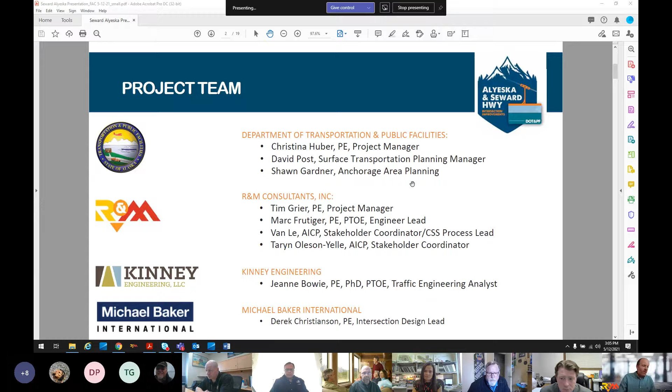So that's the project team. Quick overview - obviously the description of the project makes it pretty obvious where we're at, but just in case, we're at the intersection of the Alyeska Highway and Seward Highway near Girdwood.

The dashed green boundary you see on this figure is our study area. We tried to capture an area large enough to cover the largest possible alternative we could come up with. The pink or purple highlighting shows the extents of both Alyeska Highway and Seward Highway that are part of this project.

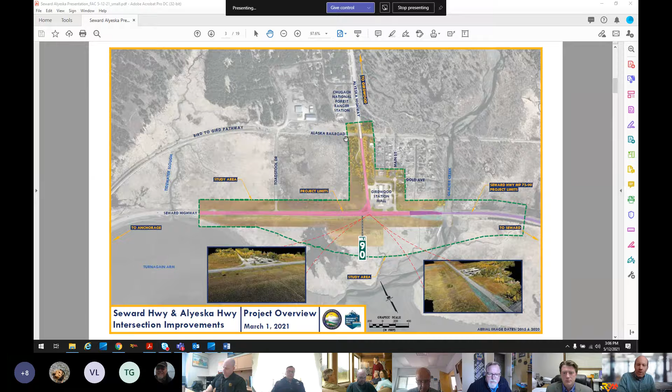This project is intended to improve the safety, capacity, and operations at the Seward Highway and Alyeska Highway intersection. That's the basic objective. Our goal right now is to select the preferred alternative out of a range of alternatives, and I'll get to those in a minute, then move that forward into the environmental process, or what we call the NEPA document.

We've developed 11 conceptual alternatives, each of which will be evaluated based on criteria I'll show you later. 11 is quite a large number, so we're trying to reduce that down to about 5 so we can be more efficient in the detailed analysis. These 11 conceptual alternatives haven't been evaluated in great detail yet, which is why we need to narrow them down. Let me dive right into the alternatives.

Can everybody see it okay? Am I going too fast, too slow, or is the transition working out? Any feedback? Everything okay? Good to go, all right, cool.

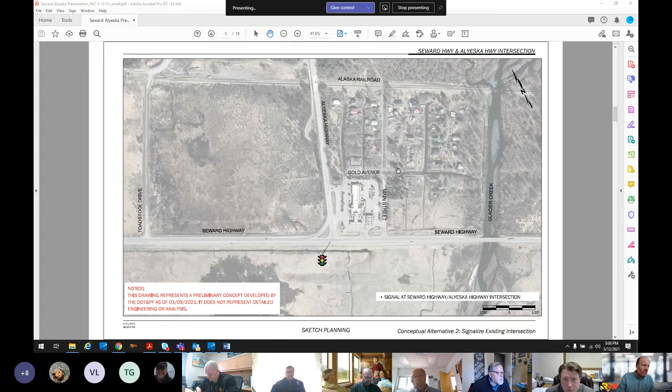Let me go back to the previous alternative so you can visualize it. Somebody coming down Alyeska Highway southbound towards Seward Highway wanting to take a left to go towards Seward or the Kenai Peninsula - that's also our most concerning traffic movement at this intersection. Taking a left, you have to first cross Anchorage-bound traffic, then cross Seward-bound traffic. So there are 2 conflicts in one location.

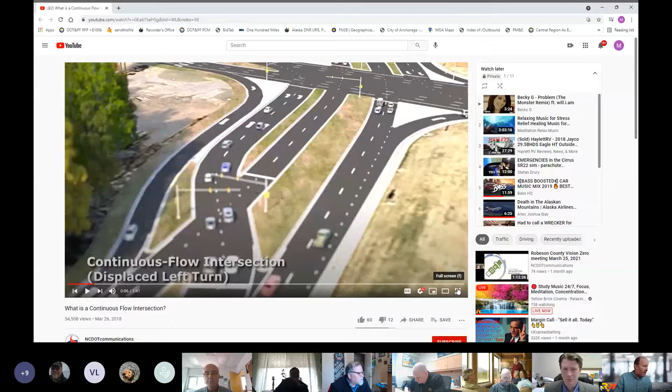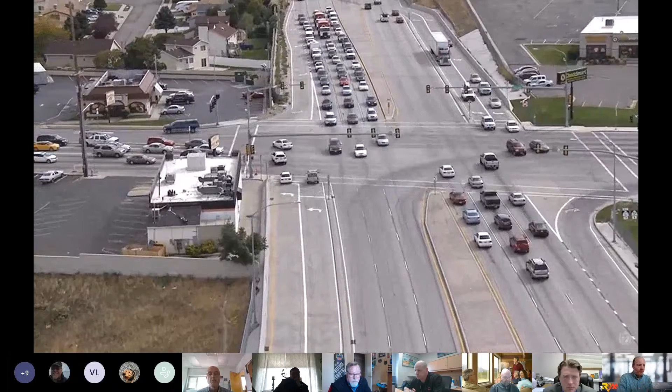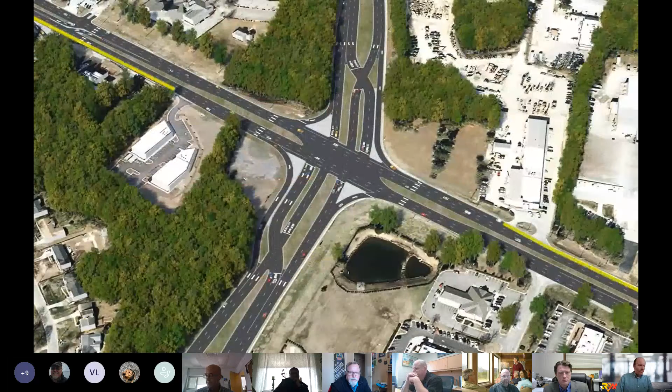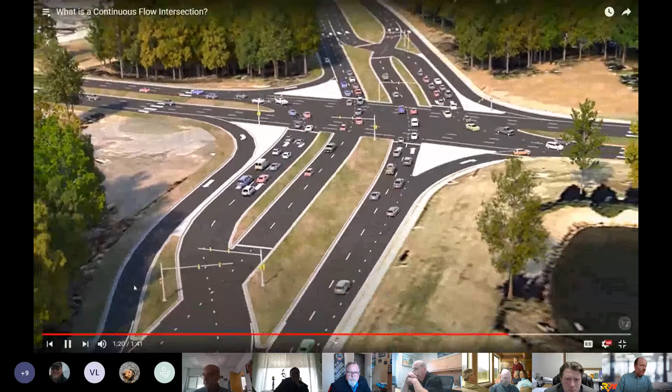Continuous flow intersection, sometimes referred to as a displaced left intersection, is an innovative design to improve intersection safety and mobility by redirecting some or all left turns at a major signalized intersection. This improves efficiency by allowing all left turns and through movements on one or multiple approaches to occur at the same time. To navigate a continuous flow intersection, vehicles on the main street or side street drive through the intersection the same as any conventional intersection. Main Street left turning traffic crosses opposing through lanes in advance of the main intersection, and the traffic signal can be timed on the through movements, so displaced left turns can continuously flow or occur simultaneously, since left turning traffic is on the outside of the through movements. This allows for moving more Main Street traffic through the intersection, helping alleviate congestion. Signs, pavement markings, and the intersection layout are designed to assist motorists safely through the intersection. Right turn movements from side streets occur on the outside of the displaced Main Street left turning traffic. Bicycles and pedestrians navigate continuous flow intersections using pedestrian signals and pavement markings across the main intersection. Continuous flow intersections have been installed in many locations across the United States and have been proven to help improve safety and operations of congested signalized intersections. Left turning traffic has also been relocated to reduce conflict points.

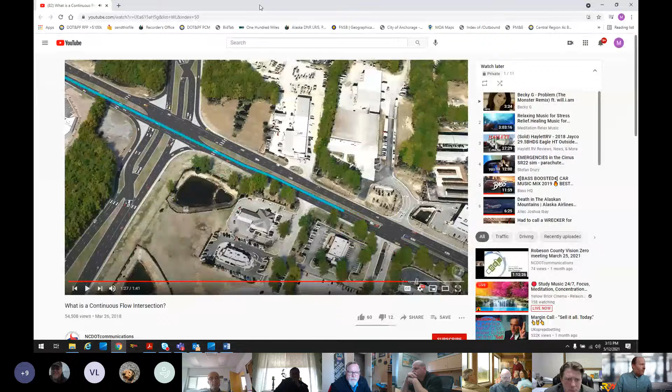We cut the video short because the last part of it doesn't really apply to our situation here. Also note that some of the footage shown in that video is from a location that appears to get a lot more traffic than we're looking at here, but I think the important point is that it shows how this sort of unfamiliar intersection would operate.

All right, so that was alternative number 4. Let me go to alternative number 5.

We call it the continuous green intersection concept. This is the same as alternative number 3, the improved signal, but the major difference is that the signal at Alyeska and Seward Highway only stops Anchorage bound and left turning Alyeska traffic. Seward bound has a constant green, so coming from Anchorage to Seward it would be a continuous green light you never have to stop for. The light is really intended for traffic coming from the peninsula towards Anchorage or towards Girdwood to stop. If you're coming from Girdwood and want to take a left onto Seward Highway, if the light's green you would take a left, and then there would be an acceleration lane, shown in detail in the upper left corner, that would allow you to get up to speed and merge into the flow of traffic headed towards the Kenai.

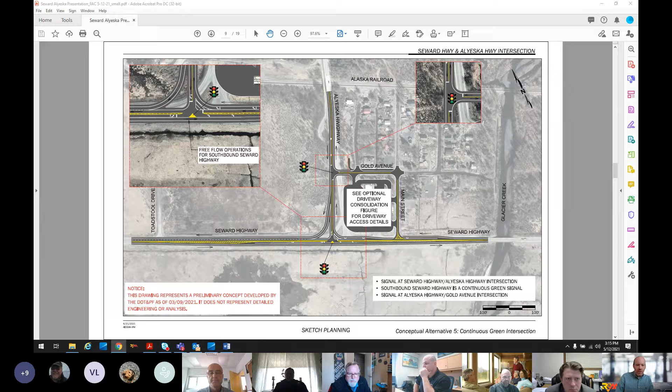That's alternative number 5. All right, now it gets big. Alternative number 6, we call it the separated highway, or phase 1 of a future grade separation.

This would separate the Seward Highway in anticipation of a future divided highway with a grade separation. You could think of this similar to what occurred at C Street in O'Malley. For those who have been in Anchorage long enough, when I came here in the early 2000s, C Street in O'Malley looked a bit like this, and then not too many years later the grade separation was completed, with O'Malley or Minnesota going over C Street. So this would be like the first phase of that kind of alternative.

It would require a bridge over Glacier Creek, but some of the major benefits it would bring to the table, including dividing the highway, is it would allow for more queuing space for vehicles taking a left, which is an issue today where they queue in front of the mall and up Alyeska Highway. That would occur partially on this leg, as well as if you're coming from Girdwood or the mall and want to go towards the Kenai, the conflicts would be spread out across two movements instead of one.

You can see here we're indicating a stop sign or a signal. That's some of the detailed analysis we haven't conducted yet. We have too many alternatives to do that effectively right now, so assuming this concept makes it to the next round, we would take a closer look at what type of traffic control is warranted at these various intersections.

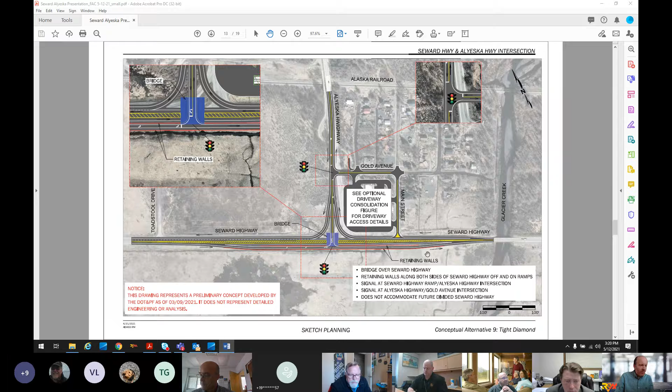But like I said, this would require significant retaining walls on both sides of the on and off ramps. Okay, now it may get a little confusing.

Alternative 10, we're calling it a frontage road concept. It's not quite the correct term for this because the focal point is more on how we're dealing with the Seward Highway traffic and how we're handling the left turns to and from Girdwood. So let me zoom into this.

Let's first take a look at this picture up here in the upper left. What we're trying to do here with the traffic on and off the Seward Highway is we recognize that one of the major conflicts at this intersection are the left turns, as they are at most intersections. So we're using a number of one-way roads, one-way streets, both Girdwood bound this way and Seward Highway bound that way, so that the left turns off the Seward Highway do not coincide with the left turns onto the Seward Highway.

So let's say you're coming from Anchorage and you want to go to Girdwood, you would take a left as you would today at Alyeska and head up Alyeska Highway. However, if you're coming from Girdwood and you want to head towards the Kenai Peninsula, you would come down Alyeska Highway. This would be a one-way, so do not enter. You would take a left at this intersection, a right at this intersection, and then stop at this location, or up here, and then take a left and go about your way towards the Kenai Peninsula.

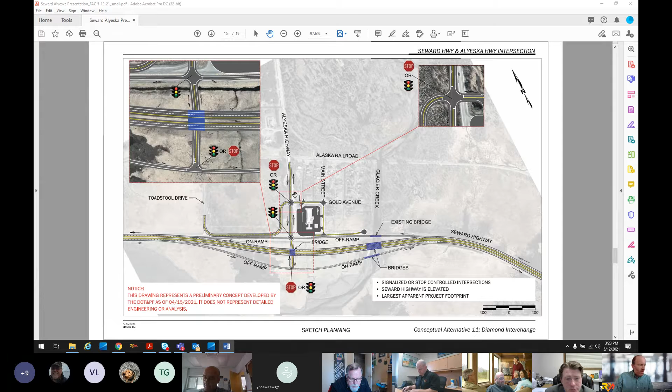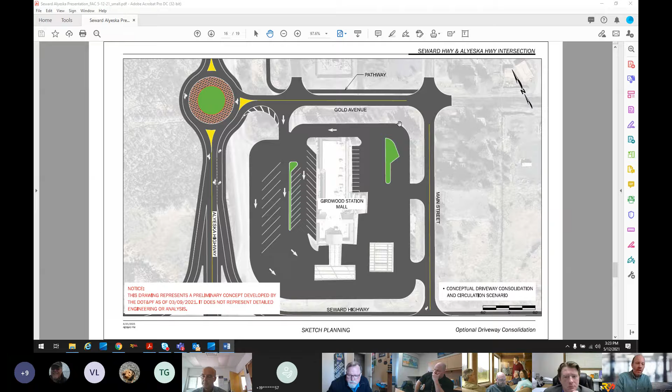Here is just a blow up of what we showed earlier for one possible way to reconfigure the local road system around the Girdwood Station Mall and some of the ingress, egress, and circulation around the mall. Obviously, we all know that Girdwood Station Mall attracts a lot of traffic, especially during the peak months. So we developed a concept on how to better handle the traffic in and out of that location, and also keep the number of access points to the Seward Highway either to none or to a minimum, and try to funnel everything to Alyeska Highway so that access is primarily at Alyeska Highway and Seward Highway, rather than at a number of driveways spread up and down the Seward Highway.

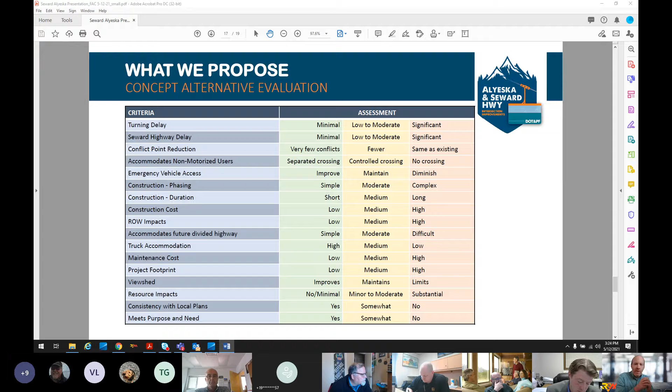Okay, so those are the alternatives. One of the next steps that lies ahead of us, now that we have these alternatives, is we've got to evaluate them to try to grade them and distill them down to the preferred alternative. To do that, we came up with a number of evaluation criteria shown on screen right now - everything from turning delay to construction phasing to maintenance costs, viewshed impacts. For turning delay, minimal is green, so it's positive, all the way to significant red or orange, which is not so good. So we're going to go through a process where we evaluate each of these alternatives and then try to narrow it down to about 5, which will then go into the more detailed analysis.

All right, second to last slide. This is the schedule we're looking at right now. Obviously today, May 12th, we're here talking to you folks. Then we have another meeting coming up at the Girdwood Board of Supervisors, probably in July. And then our big milestone that lies ahead of us is the Planning and Zoning Commission - we're going to present to them the preferred alternative tentatively at the beginning of October. So between now and October, we're going to narrow down the 11 alternatives to about 5, and then take a closer look at those. Before we go to the Planning and Zoning Commission, we will have a preferred alternative that we can recommend.

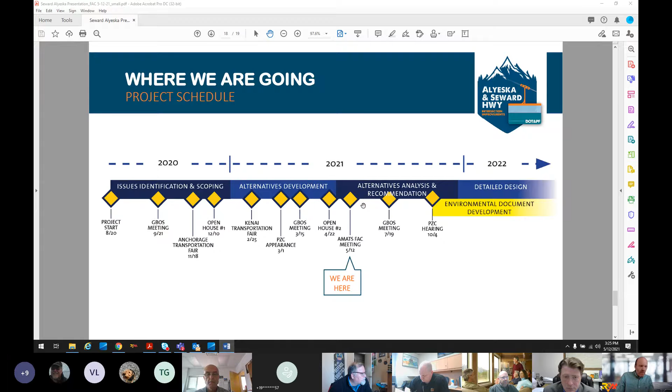Okay, I think that's it. I again want to thank you for the opportunity to allow us to present today, and certainly we're happy to take or try to answer questions and hear your comments. Thank you.

Thank you, Mark. We've got some seasoned professionals on the line, some of whom have had a chance to review this prior to today. I'd like to turn this over to Jimmy Doyle to talk in general about doubles and roundabouts, and some of the ideas, and also the speed in that area. Are you in a position to talk about that, Jimmy, or do you want me to?

You bet, Joe. I would like to, and thank you to the committee. Thanks to all for the presentation. It's really interesting. I learned some more that I didn't understand when I first saw the options. I have a couple of general questions besides the roundabout issue.

If option 6 builds into option 11, why would you go with 6 first and not just get the whole thing done as 11? I imagine it's the total cost, I'm just asking general questions. You said option 11 comes from option 6. Why wouldn't you just do 11 first?

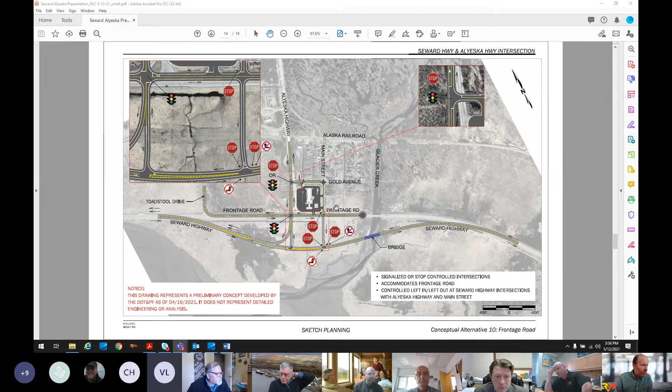Richard, are you talking about this alternative I'm sharing on screen? No, actually I was thinking of one earlier, where you're keeping the original route on the highway. Go back one or two. Sorry, I forgot to write the right number down. It was one of the... sorry, that one. So at this point, are you completely eliminating that straight route path through the original Seward Highway?

No, that would be the divided portion of the highway Anchorage bound. So that would be for traffic. Anchorage bound would stay on what is today the Seward Highway, and Kenai bound traffic would divert away and go this way. The only reason I'm asking is it seems like with a number of the alternatives, if you wind up with a crash at that intersection, you're back to trying to find somebody a hotel room because nothing can move for 5-6 hours. So would you be able to route traffic through that so we'd keep some kind of flow?

I can't answer that question exactly, Richard, but my thoughts would be that this would give some options for traffic control. If there's a crash at the intersection, perhaps the 2 lanes headed Kenai bound would be available for 2-way traffic or flagger-controlled 1-way traffic or something like that. It seems to me like this would provide more options in case of a crash rather than just keeping the highway where it is today.

Yeah, the reason I ask is, like I said, a number of times, as everybody knows, if there's a crash somewhere on the highway where it's only 2-way, your driver's stuck for hours. This being an intersection with a large, even if we reduce the amount of traffic here, it's still a high frequency intersection. If something happens here, we can still allow our guys to get through. That'd be my only concern, I'm just wondering if that's part of the consideration.

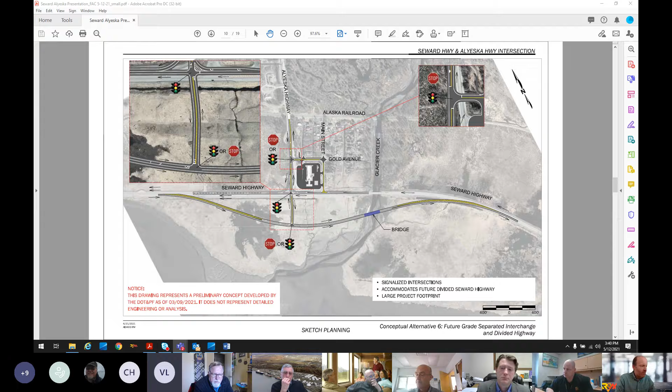Joe, you had two other individuals that had their hands raised. And I should know how to do Teams a little bit better, but I'll be quiet. Anybody who had their hands raised, please speak up. I'm one of them.

Ms. Hubert, go ahead. Yes, so again, I wanted to go back to Richard and Jimmy, hearing clearly that the roundabout was your least favorite, then it went to the bottom of your list. Did anything go to the top of your list, or maybe one or two that at this point you would gravitate toward?

Richard, do you want to go first? I did like the way that the trumpet-style fork seemed to allow for a more continuous flow of traffic. I'm not as big of a fan of the traffic lights either. The only thing I liked about that one was that there was an alternate lane passing through that location, so if something happened to make it so you couldn't get through, everything doesn't grind to a stop. But anything that allows that continuous flow of traffic, I'm definitely for.

My only concern, which I think you already brought up, would be if we're doing anything that goes above the highway, the height. Yeah, I agree, the height thing — if we weren't concerned about the height, and I don't know how high you could build it, you're going to have stuff going through there that's going to be 16 feet tall, possibly. If you can go above that height, then you're good with that overpass.

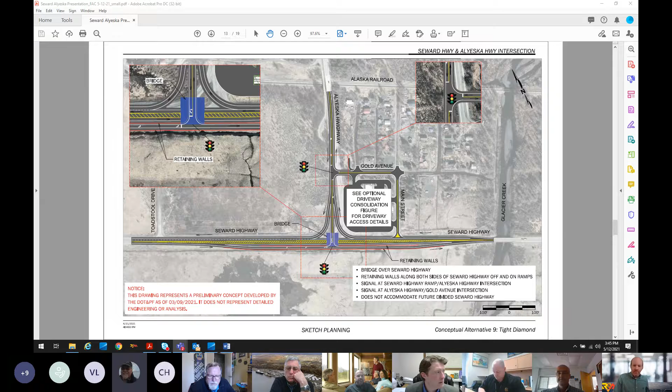Yeah. Okay, so we are on business item part C next, and it's the expected actions of the Freight Advisory Committee. On this front, I wanted to bring up the document that John emailed out to everybody just about half an hour before the meeting. It is titled - could you pull that item up, John? The upcoming state and AMATS road and highway construction projects. Yes, let me just give me a quick second here.

And I had questions for AMATS staff on this one. Are the criteria and the parameters with AMATS - you guys speak with DOT, and you guys kind of have a list of criteria that moves things forward and back on this. Could you guys talk a little bit about how you guys come to a conclusion on which ones are coming out of the STIP and which ones are coming out of AMATS?

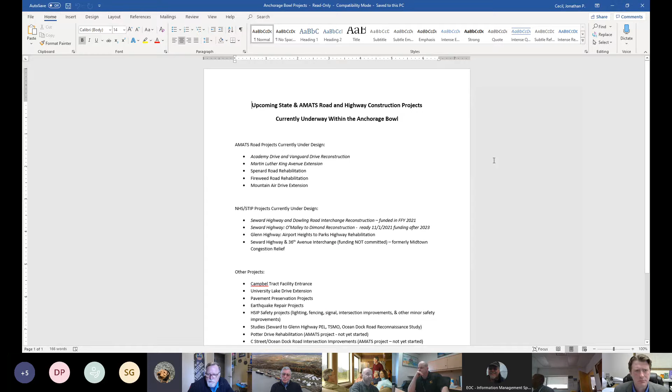Yeah, this is Craig. So with our criteria, what we do is we start with staff. Staff does the research, figures out their suggestions for the criteria that are used to score and rank projects. And then after that, the agency folks get a chance to look at it. The folks are engineers both at the Muni and the state, and the planners in both locations, to give their thoughts. Then the next step is for the committees, the technical and policy committee, to release it for a public review stage. So we're looking to try and get those released next month. And then they'll go out for a 30-day public review for everyone to get a chance at it. And then once we get the comments back, staff then feeds those to the committees again to get them to approve them, with any suggested changes based on those comments. And then after that, we start the nomination process of getting projects ranked for inclusion in the TIP.

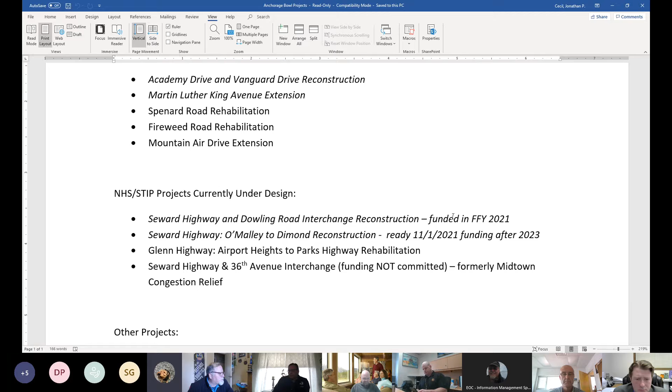The key thing is that the STIP projects are usually on the national highway system. Those are the projects and the funding that the state controls. The AMATS allocation is usually smaller, and that's what those TIP criteria are for. So I imagine some of those criteria might be similar, but they're obviously not exactly alike. So does that answer that question for you, Joe?

Yeah, thank you. I see a couple of DOT representatives in attendance, notwithstanding the commercial motor vehicle enforcement member of the committee, but James Starzec - on the DOT front interfacing with AMATS, is there any hiccups between the two? Is there anything we can do to improve from just our small freight advisory committee referral, just kind of the 30,000 foot view of how this is going?

This is James Starzec, the AMATS transportation planner for DOTPF. In regards to the TIP criteria, we have members of DOT on both the Technical Advisory Committee and on the Policy Committee. We chair the Policy Committee. When these are released to the committees or put into a work session, as we did last week, there's a lot of coordination with DOT and AMATS staff in preparing these criteria. We have plenty of feedback. The reason we were looking to engage with you folks today was more to just kind of give you the heads up, because as Craig was saying, these should be going to public comment over the summertime.

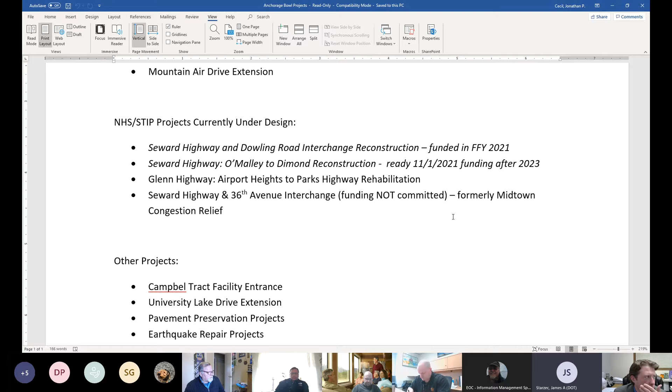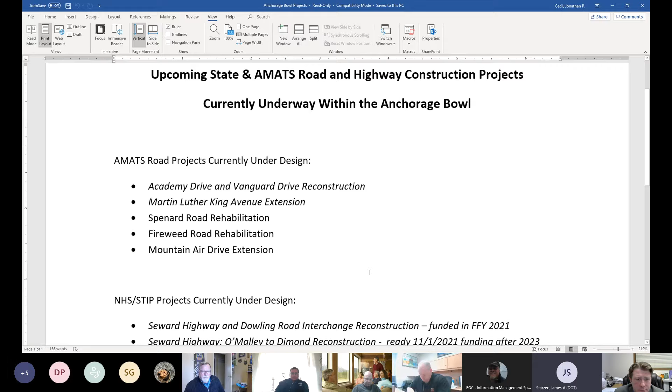You know, those are things that are very relevant to DOT operations, and I think that's reflected in a number of our projects. The project list that was provided by Mr. Post kind of illustrates the span of projects here in the Anchorage Bowl area, and the italicized projects are the ones that we see as having an impact on freight mobility and congestion issues. And there's not a whole lot of them.

DOT does have a mandate to maintain the infrastructure for commerce. So when we look at these criteria, we think about how can we show that priority through the development of the criteria. That's when we thought the Freight Advisory Committee would certainly be very helpful in figuring out how we can create criteria to help maintain that goal and reflect that importance in our planning process.

David Post, would you have your hand raised? Do you want to round out some DOT comments, and then we'll move slightly forward?

Yeah, thank you. Mostly we just brought this forward because we wanted to make sure that the Freight Advisory Committee was utilized as an advisory committee with these TIP criteria. Just briefly looking at the TIP criteria, out of a possible 58 points, really there's a maximum of 3 that would be given to freight considerations, with only as many as 2 possibly focusing on congestion.

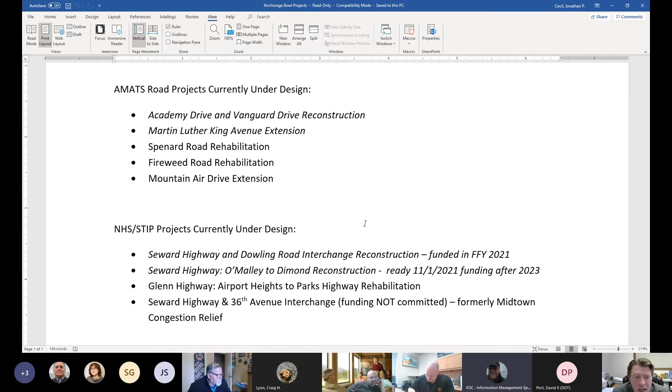One of the things I wanted to talk about, if you could scroll down a little further under other projects. They just awarded the contract for the Ocean Dock Road study. If we're looking for projects, that study covering C Street to Ocean Dock Road, I'm looking forward to being able to make comments to the engineering firm that will start identifying the problems going on down on Ocean Dock Road. So to learn more about the criteria and make sure we're not dropping the ball as a freight committee in looking at projects and reading things. I'm trying to keep my head on the horizon, but it looks like in the short term we need to be looking at that as well. I'm looking forward to learning about that study and speaking with the DOT person on that front, since they just awarded the contract.

I'm looking forward, during our next committee, to having those engineers from the design firm here to talk about things. Just as information, the status of the criteria right now is that we've sent it around to the internal agency folks, since we had our work session with just the technical and policy committee. At that point it was just an internal staff document. Now it's gone around to the agency folks so we can get experts on both sides at DOT and MOA to weigh in before we launch it for public review. So they're not ready for prime time, they're being chewed on internally right now. But as soon as the policy committee agrees to release them, in whatever form that might be, I'm more than happy to schedule a special meeting of the Freight Advisory Committee for you folks to kick them around a little bit. But they're not available yet. So that's the status.

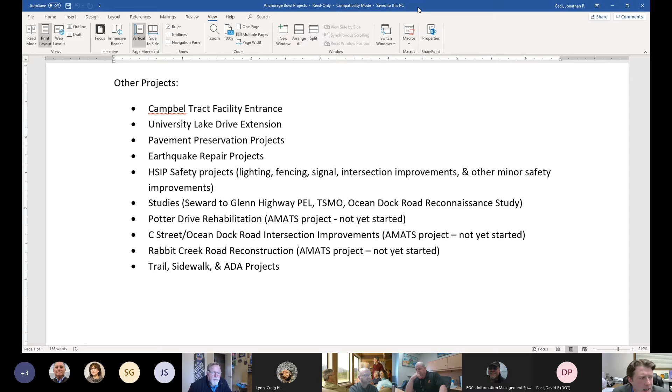I'll definitely get with the professionals from AMATS and DOT and look to see if they've got any projects hiding underneath the shelf that we can start advocating for as far as getting our freight through the Anchorage Bowl.

Moving on to informational reports, I wanted to make the committee members aware of the Alaska Statewide Long Range Transportation Plan. There is a freight advisory aspect of it. There was one meeting where the engineering firm outlined how they were going to identify projects, and there's going to be no specific project identified by the long range plan. It's a lot of policy documents.

But what I want to make you guys aware of is that we are going to have to be paying attention to it for about a 2-year process, 18-month process, but we are going to have to pay attention to it at every step along the way, just to make sure that freight is represented in that long range plan.

When they talk about the long range plan, these things cover everywhere from boats to 4-wheeler movements out in the village and things of that nature. So there's going to be a moment where we might need all hands on deck for comments, just to make sure that when they're putting hash marks and tallying who made a comment for what, we put up a pretty big number on that thing. That way, when they say they took public comment, there's plenty of public comment for us.